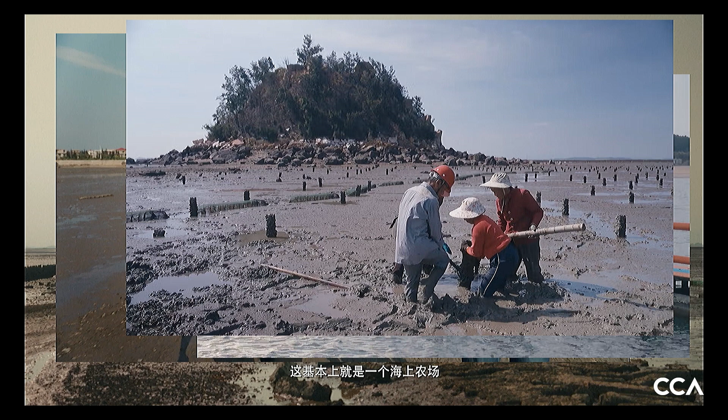So we are in Meizhou Island with Xu Tiantian, on the mudland in front of Meizhou, exploring with the engineer of the project the relationship between the high and low tide, the different ecosystems on the site, the actual construction or removal of some parts of existing elements composing the oyster farms to allow for different types of passage to the site, following the communities, exploring the areas, and reflecting on the possible intervention.

Then moving to Berlin, where we've been following the making of the political campaign of B+ for Ours Europe, eight months before the voting started, somehow spying behind the door on discussions about how architects try to make a political campaign, in this case following postering and communication about the issue of demolition, understanding critical sites. This is the Tempelhof Airport in Berlin, the largest vacant building in Europe, and the real making of communicating a campaign saying no to demolition.

And then here some behind-the-scenes of what just happened in the few months before today, before the construction of this project. We've been following Carla Juaçaba literally on the ground among the coffee plantations in Minas Gerais, with Milena Rodriguez and the team in São Paulo, in between the different plantations of coffee and the different plots in Brazil, in Minas Gerais, to the plantation of eucalyptus trees that Carla has been using for her project.

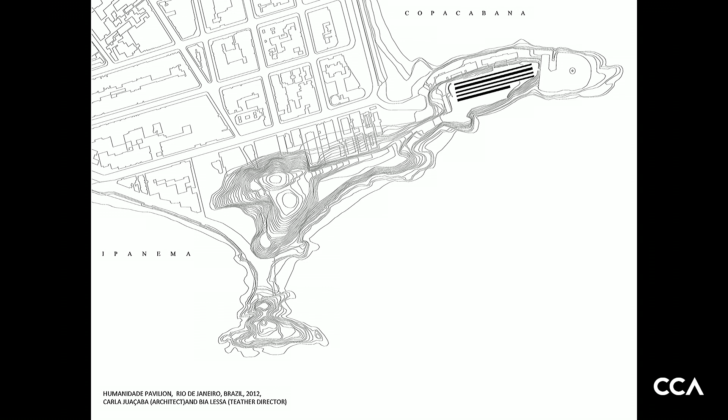I'm going to show a project from 2012, made together with the theater director Bia Lessa. Humanidade Pavilion was a temporary building made with 9,000 square meters of scaffolding for Rio Plus 20, the International Conference of Sustainable Development. It is a design that comes from the observation of a place, in the case of Copacabana, of its events.

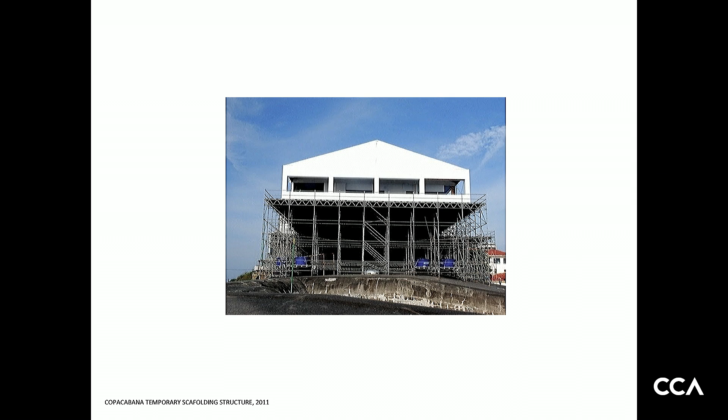If you go to Copacabana at any time of the year, there is scaffolding for volleyball, or for shows, or for New Year's Eve events, horrible. And that's what I found. This is one of them: a plastic tent with air conditioner inside, supported by continuous scaffolding walls, 107 meters long and 5 meters high, with a platform.

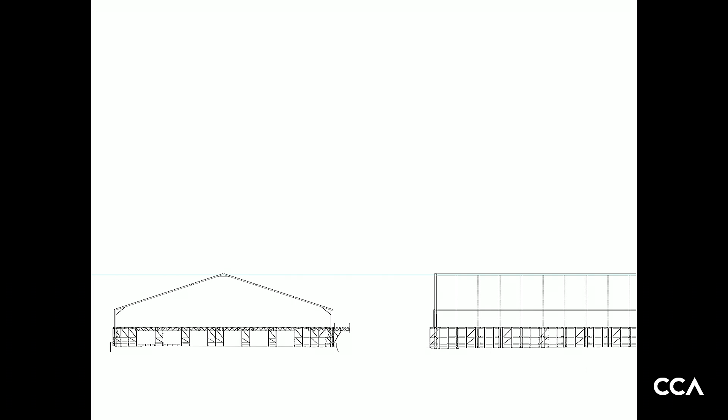First, there was an invitation to Bia Lessa to do an exhibition about sustainability in this plastic tent, and she said, I'm not doing an exhibition of sustainability in Copacabana with air conditioner. So she started looking for an architect. She looked for Paulo Mendes, who was busy, fortunately. Since I worked with her, I asked if I could do a proposal.

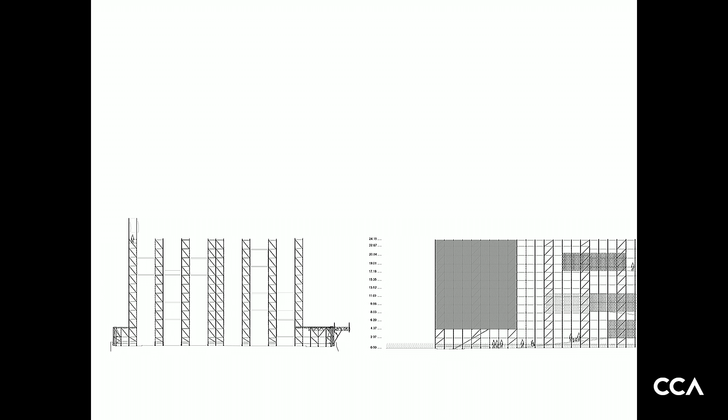So the idea is to remove the plastic tent and continue this pre-existing fragile scaffolding structure up to 25 meters high. The stability of the walls, of course, comes from the program that is attached to them. This is the final section; it is exactly like this.

There's an auditorium, a small one looking to the sea, and a big one for events, separating the public because it is for the United Nations. So there were entrances for the United Nations and entrances for the public.

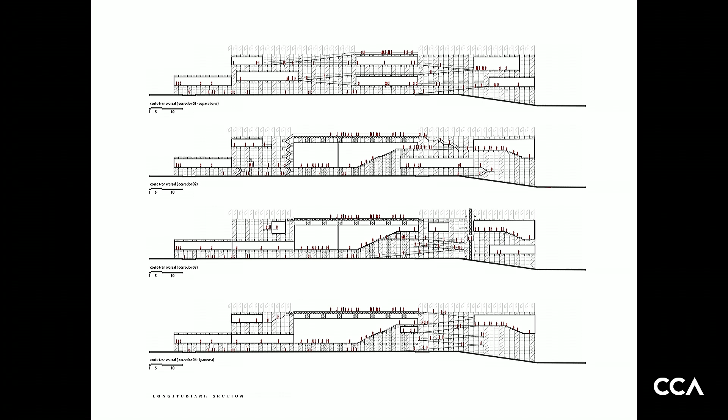It was visited by 200,000 people in 15 days. There was a one kilometer line, but that's Copacabana, everything is a one kilometer line. It's just because it's free.

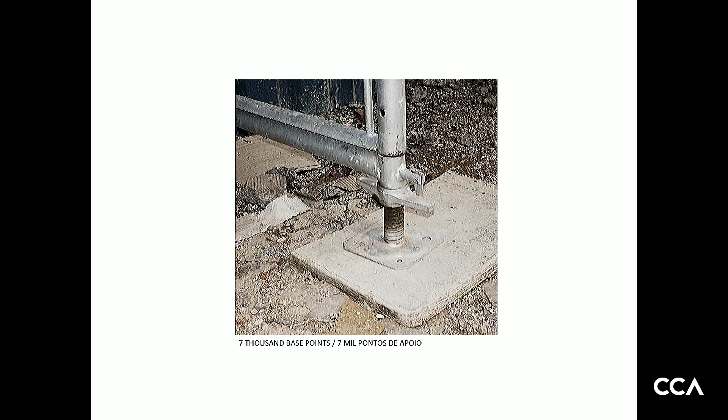I like to show this image because it shows the 7,000 base points with no foundation. That means when this building was dismantled, there was absolutely no trace left in the ground. The sustainability, let's use that word again, is in the material itself, which has been and will be used in other buildings. So there is a pre-existing structure.

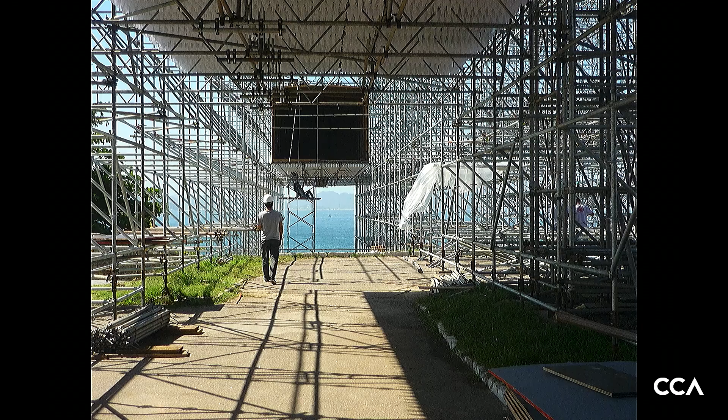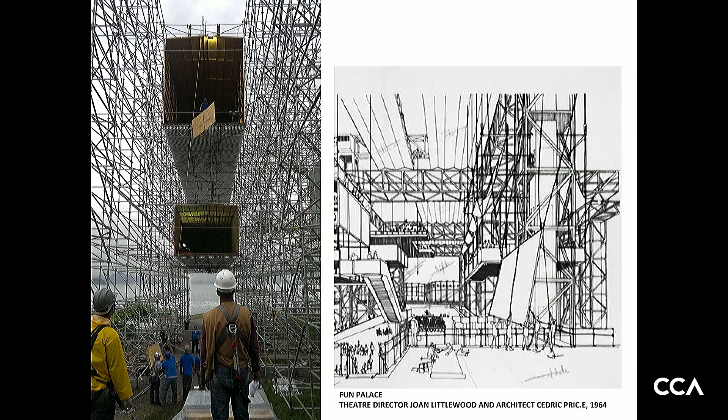These corridors already existed; they just extended the walls. These are images of the construction, and it's very funny because it's in the core of Rio, in Copacabana, and no one knew what was happening because the newspaper didn't want to talk about it for political reasons. So this thing was just growing there, and no one knew what it was, until they had to announce it was free to enter. So on the first day of the opening, people started to know what it is.

This is the picture of Cedric Price. I saw Cedric Price's work today, but I hadn't seen this image before—wonderful, a wonderful visit to the archive. The reference is obviously there, and it's impressive how an architecture project that never existed is part of our imagination and of our cultural world.

The images are similar, but the intentions are very different. I think Cedric Price was inventing at that time this image of the future, this image of the progress that culminated a bit later in the high tech. But we are in a different moment.

I think Humanidade Pavilion is an image of the present. Again, no utopia, because it responds to questions of our time.

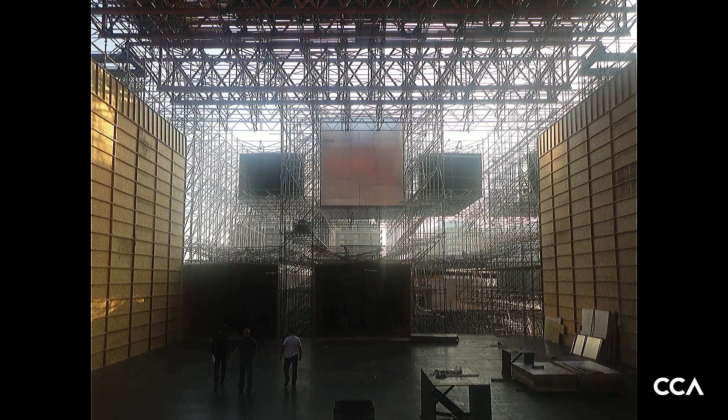If I explain how it was made, it's almost unbelievable, because as Brazilian, let's do it. So there is no construction technique to follow. This is a scaffolding building, but it's for people.

There was a crisis in the middle of the building, whether this was really going to stand up with so many people. And it was very funny, the answer of the engineer: how come? It's not a problem, it's 7,000 base points. Nothing's going to happen.

So they continued. This is a time lapse — this was constructed in 4 months, and it was constructed while we were still projecting it, which was very crazy and difficult to believe, but it's true.

It was very, very funny, the comments of the public in Copacabana, on the television. Is this a green building? No, it is not a green building. And then another woman said, everything's very beautiful, but when are they going to remove the scaffolding? So the opinions were very, very different and funny.

After this, there was an invitation to do a project in Brasilia, a temporary one. It didn't happen because the crisis in Brazil began, but there are some ideas about it. The Ministry for All is an imaginary building for Brasilia, set within this grandiose esplanade of the ministries.

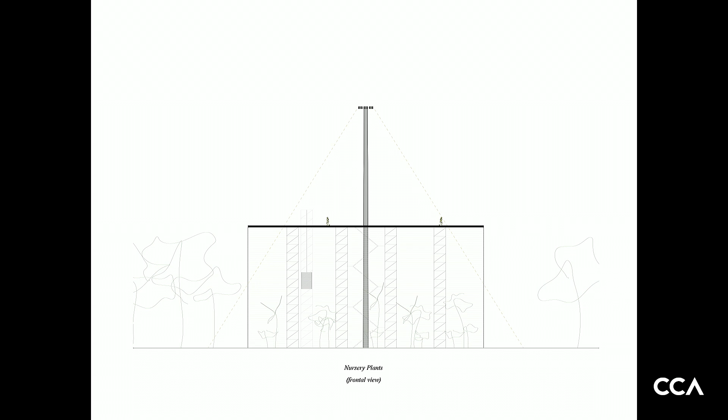So the project is a belvedere where visitors could climb 22 meters high and see the parks from above. The construction goes around this concrete post, 45 meters high, taking advantage of the 60 meter diameter, for illumination.

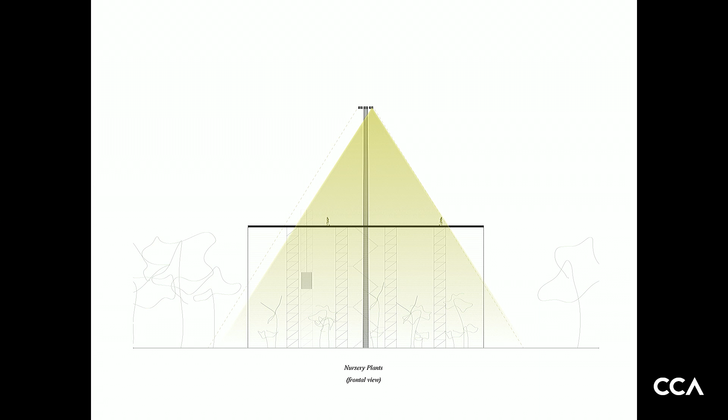As I said, it's not a project, it's just a sketch. It would probably be something else if I were to actually do it.

This is the Vatican Chapel, made in 2018, invited by curator Francesco Dal Co at the island of San Giorgio Maggiore in Venice. He invited 10 architects to do temporary chapels, which aren't temporary anymore - they're part of the Italian heritage.

Francesco sent an email asking if I wanted to do a chapel in Venice, and I didn't respond because I thought it was spam. I don't know him, so I thought it was spam and didn't answer. Then I took some days, and he took some days too before writing back again, asking, 'Are you not going to answer this?' And so this is the video he sent.

I couldn't go to the site, so he sent this video to explain it. I thought it was very beautiful - the level of abstraction, this life that comes and goes, this noise, this feeling of Venice behind the trees.

It was very nice. So I'm starting with the foundation, because I like this image - it's a foundation of only 12 centimeters under the ground, with pieces of concrete just landed there.

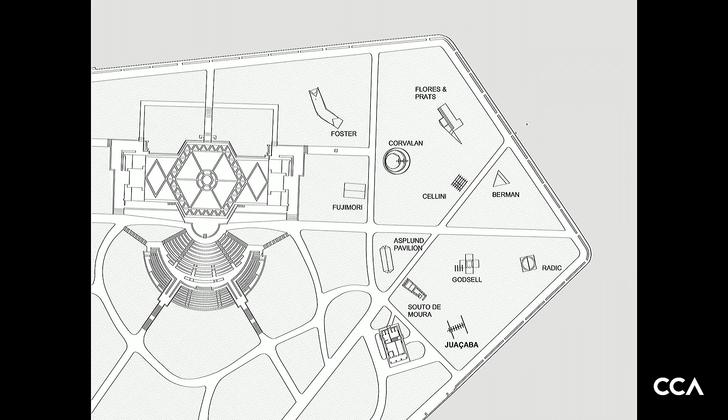So there are 10 chapels, and it's 2 crosses - the cross lying down is a bench, and the standing cross is the cross. It's a very synthetic program, a very old program: you go to the chapel and sit to look at the cross.

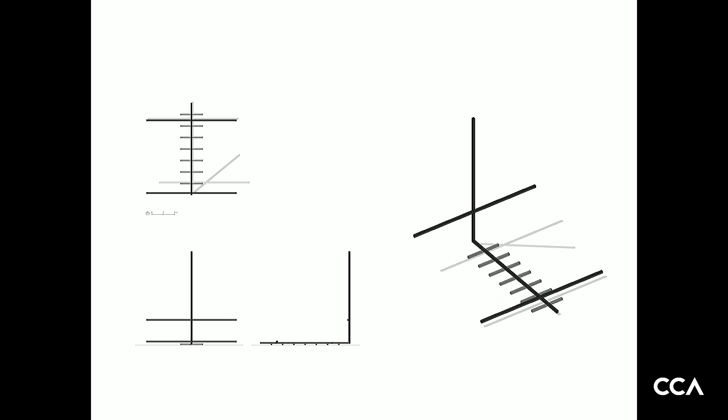There are many - this is the model, this is the level of model I do. There was this question all the time: is this architecture, a sculpture, or an installation? And I said, no, this is architecture because it has a program - you go there, sit, and look at the cross. That's architecture.

And then Souto de Moura resolved this problem for me. He said, of course this isn't a sculpture - who sits in a sculpture? So he resolved the problem of years.

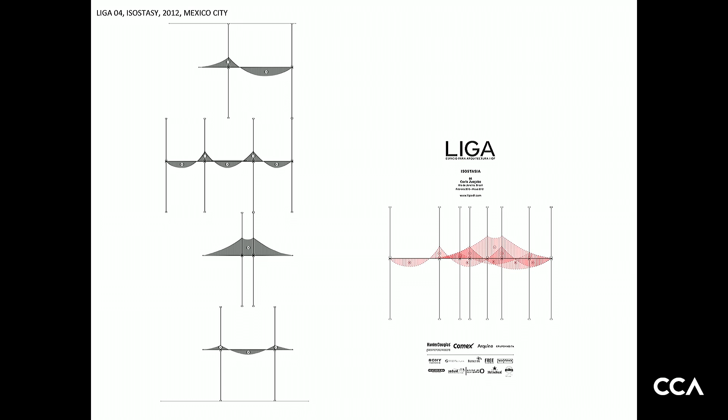A few years before this, I did an installation just showing - because I find a very abstract relation between this object and the chapel object. But it's very abstract, just lines floating in the air - a brass beam of 1 by 1 centimeter.

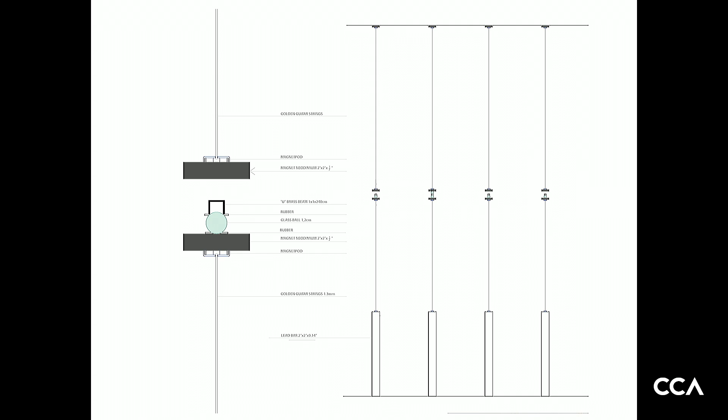With this installation, I could observe that this thin line could really do a drawing in the space, suspended by the force of magnets. Nothing is glued - everything is suspended by this force, and there's only one point of equilibrium.

So there's an apparent tranquility in this object, but there's a high level of entropy, and this effort - this entropy - is never seen in architecture.

But in this case, I didn't know - we don't consider earthquakes in Brazil - so there was an earthquake and everything collapsed and broke down on the floor. So Isostasy is not just from Mexico.

So I do this visual association with the chapel, but with a certain distance, of course.

This is Storefront for Art and Architecture gallery, and as you know, everything in New York is too much highlighted, too much fashion, too much - too iconic. So the first thing I thought with this invitation was to undress this iconic facade and remove it.

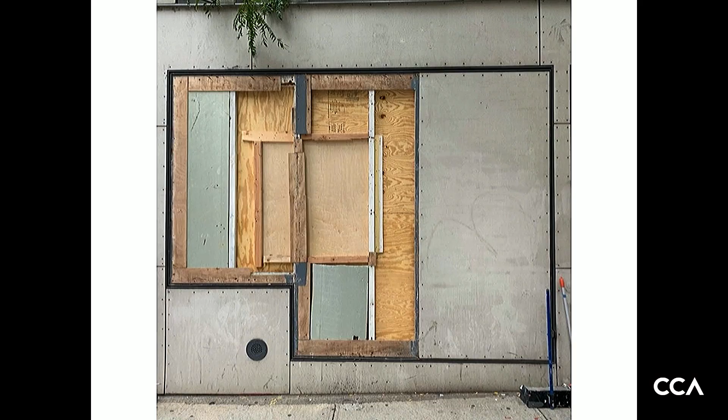But I didn't know I was going to find a favela - I thought it was going to be like a Swiss construction inside, but it's not. It was this, and it was so beautiful to discover. I think they had a lot of fun doing this, just putting piece by piece - I can imagine.

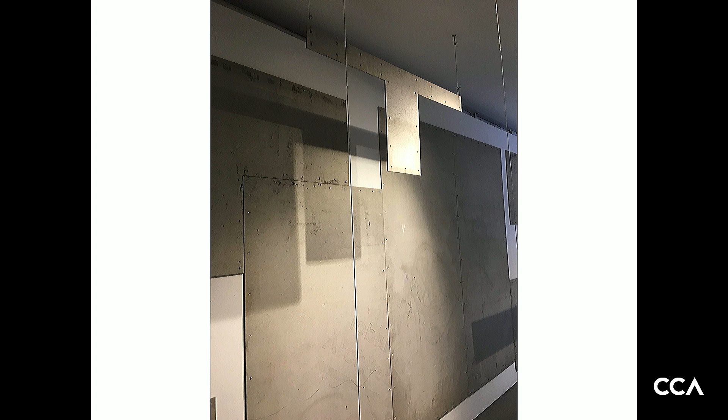So the idea was to undress the facade and do an installation with the elements of the facade inside. So I did this gesture of undressing, and the other artist came and took the pieces and made them flow inside the galleries, because José Esparza wants to return to the origin of the gallery, which is art and architecture with no highlighting of the artist. So it was like actions - we didn't talk to each other. No talk between me and the artist, and I removed and he did inside. It was very interesting, because it was just about elements that come from the facade to the inside and return to the facade, so there was absolutely no material besides what is there. The name of the artist is Marcelo Cidade, from São Paulo.

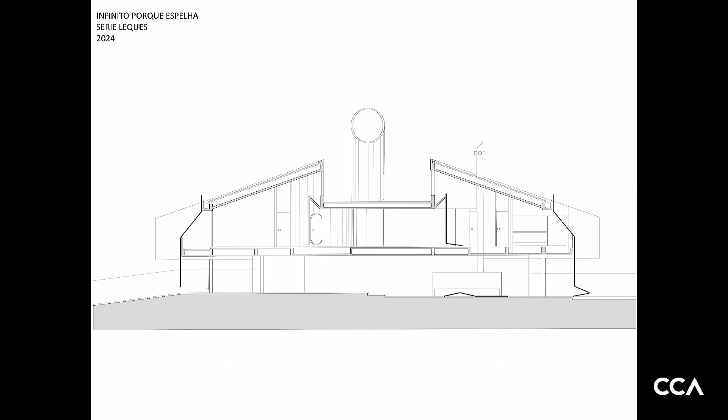And then another, because I do work with installations too, with houses. I'm going to show this last one, because it's very recent - the series that's fashionable now in São Paulo. When you're going to sell a house, you do an exhibition, or invite someone to do what you want. So I wanted to take this house, very iconic, a brutalist house designed by Sidônio Porto in São Paulo in the 70s, and unfold these mirrors, transforming the space, really as a reference to Lygia Clark, the neo-concrete object that she moves and manipulates. But this is manipulated over a facade and inside the house. So it's just an installation, but it was interesting, the process with this very young curator, and very nice to do. I like it very much.

In a way, I was seeing this brutalist object as an object, really, and then removing all the furniture and folding these mirrors around. I was profiting from this geometry, this concrete geometry.

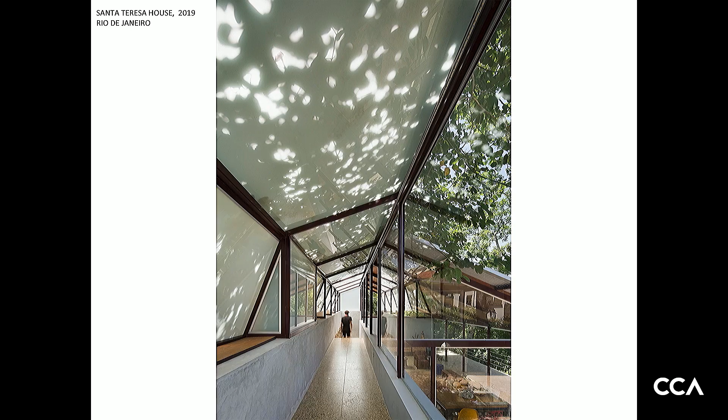I will show a couple of houses, because this is part of my life, and also today I have a couple of projects now going on of houses, so it's part of my work. I never did a house that exceeded 140 square meters, which is not common for the bourgeois life of Brazil - they really exceed on this. I think it is for the clients that not really had problems of a budget, but it was more about finding what is necessary for life, and relating with this beautiful nature of Rio.

So this is the Santa Teresa one, in the mountains of Rio.

This is the second house I did, also in this forest of Rio, very cheap - very cheap, though, so this is very raw, there's no layers of anything, and this light that traverses during the day, in this forest that is absurdly beautiful. And 1.5 meters of projected roof to open the windows when it's raining, because I think this is one of the wonderful things in the Atlantic forest, is to feel, to smell. I remember in my house it's like, it's raining, so run to close the windows. And I said no, I'm going to do houses where you really open when it's heavy rain, and there's nothing, so you can profit from this.

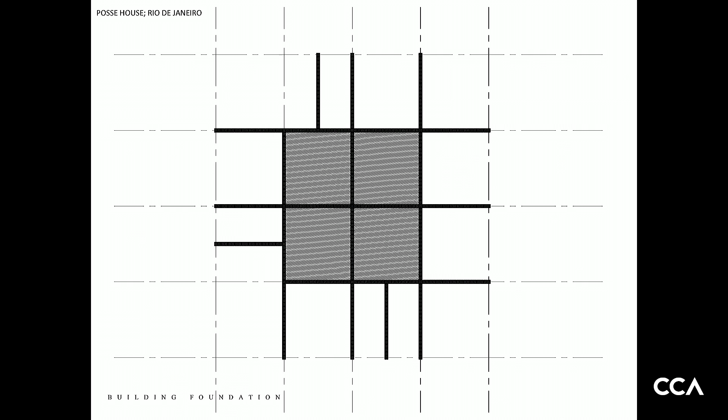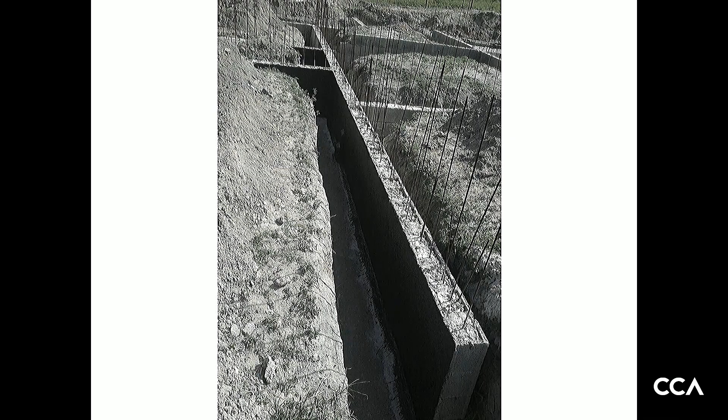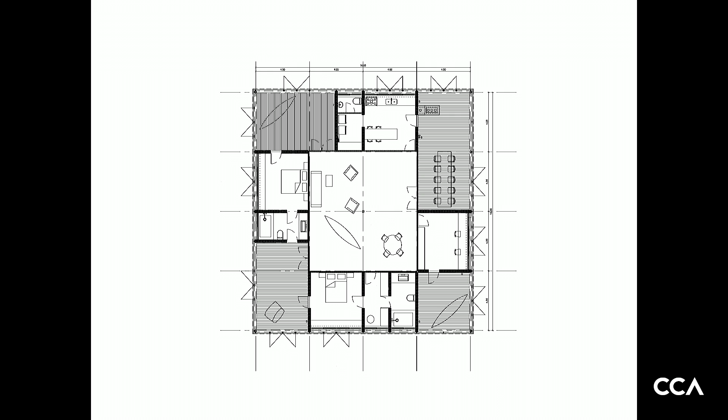This drawing is the drawing of a house, but it's the drawing of the foundation. The soil was a hard soil, so I didn't need foundation, just to level it, to find a level. And the foundation is a drawing, but the foundations are the wall, and the foundations are the structure that goes on. It's just to show that this idea of transformations of ground is a design - it is our very first design, how we transform grounds. It needs our last design, foundations, but I think there is a gesture. This is a house that's been under construction for many years because it stopped, and now it's returning to finish the construction.

And I'm going to show the Flor de Café. This is the view from this structure that we are proposing. On our trip to film, I photographed these billboards, which was an inspiration because they're very fragile - they're the only vertical element in the landscape, the only built element on the landscape. So it was the beginning of the project, using both sides to inhabit.

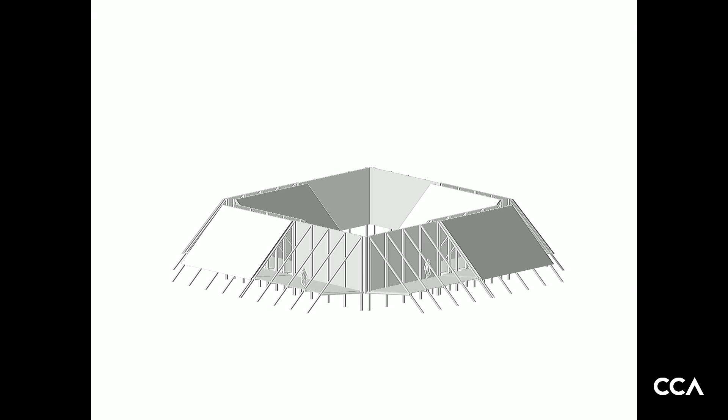But it's made of eucalyptus, which is in the forest, very easy to have. So the idea was to do a very, very inexpensive building. And all the detailing process was to remove complexity, not to give complexity - that means make it as simple as possible, and that means to have fewer actions.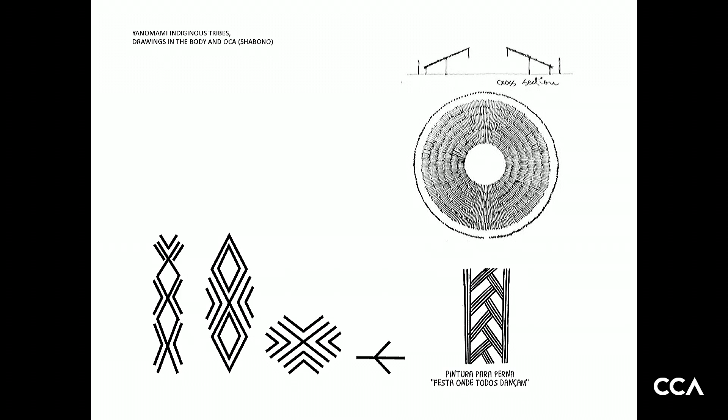If you complicate, or if you do beautiful junctions of wood, that means work, that means budget, that means energy. So I think we have to think about actions when we draw. A drawing is an action, not an abstraction.

I'm using the reference of the Shabono, the Yanomami, drawing houses, and the geometry that comes from the Flor de Café is inspired by this both the center empty and the geometry.

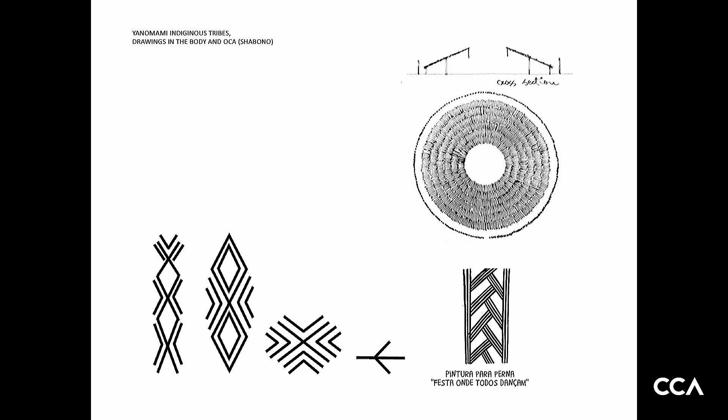So as it is in the exhibition, we took a very long time to find the dimension of this project, because Milena dreams like crazy, so I didn't find the dimension of it. She wants an auditorium.

She wants also people to go there and sleep, and then it becomes a huge thing. And I said, let's do something smaller, feasible, inexpensive, and then if you want, you continue with these models in other parts, and I don't think she needs it.

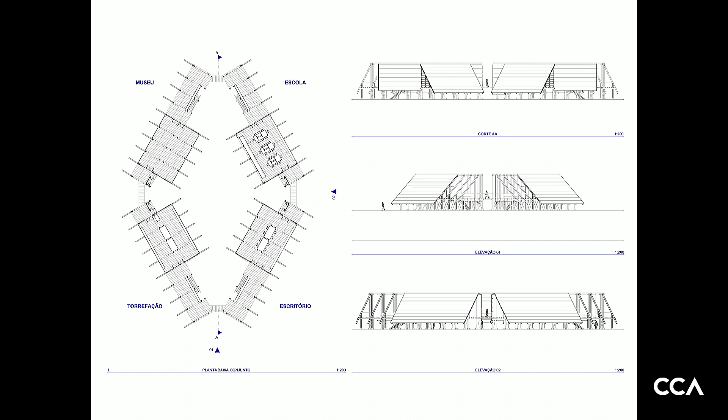So again, the thing is to elevate, so the ground is free, as all the grounds are free in Brazilian architecture. If you remember MASP, you remember that Lina's ground of MASP is open, from the playground to a public manifestation, to a carnival or whatever.

And so we understand ground as a free space, and this is part of our Brazilian culture for sure. And this is a ground also free.

We can imagine many workshops in the ground for children. We can imagine a screen for a cinema, an outdoor cinema inside this courtyard. So you imagine what life brings.

Also, if you remember the USP, it's the USP of Vilanova Artigas. It's a building - I don't know if I've ever been to another building with no doors. So you enter from any side.

It's really this free ground, and that's what we want in this project.

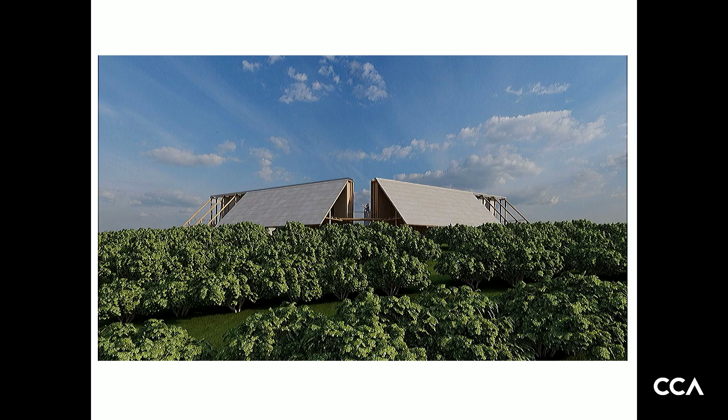And I think it's very enclosed, so you have to go out to the terraces to see this beautiful view, but you have the ground. And it's built exactly as you saw there.

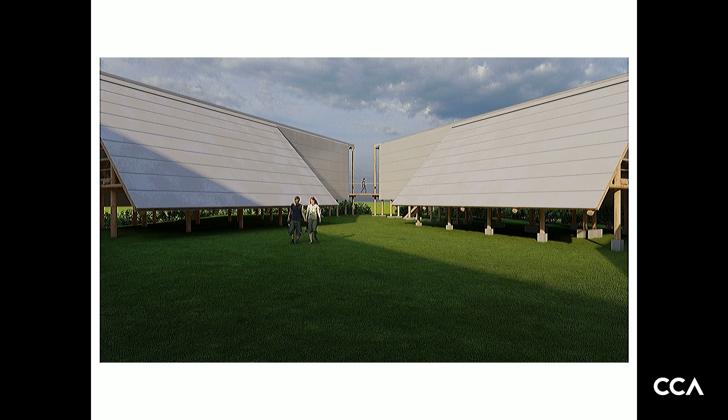It's made with eucalyptus. The metal is what Minas Gerais produces, metal. And this is the courtyard I'm talking about.

I don't think it's grass - I don't like 3D, but we did 3D of grass. I think it's more like sandy, more like a ground, as it is in these places, to see the view from every border.

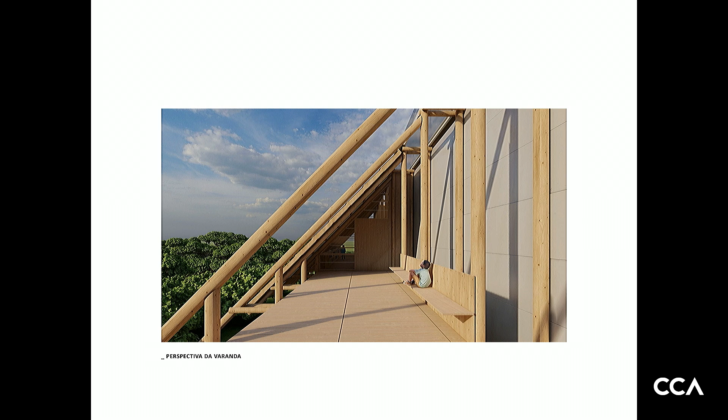And these are the details, just to show that this took a very, very long process to just assemble them like this, right? Make it super simple.

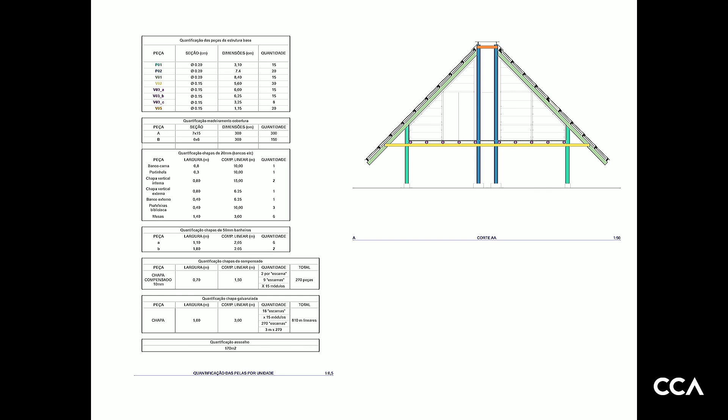I'm going to finish with the sentence of the philosopher, indigenous leader Ailton Krenak: 'stepped gently on the ground.' And this sentence, I always imagine it in each discipline has its interpretation, but in architecture...

...it's about how this ground, and what I was talking about, foundation, is the first intervention, and how do you really transform territory as a first concern, as the first thought, first idea.

So it's open to imagination. I like this sentence, it's very beautiful. Thank you very much.

Thank you so much for your presentation. It was very interesting, and we've seen a lot of the beautiful project that you made.

I have a question regarding the use of eucalyptus in Green Desert. Eucalyptus is non-native to Brazil, so it is an invasive species, and that is very harmful to biodiversity.

My question points towards: were there any other options in terms of timber? What I'm trying to say is we're trying to speak about addressing ecological crisis within architecture, but is there a reflection done about that?